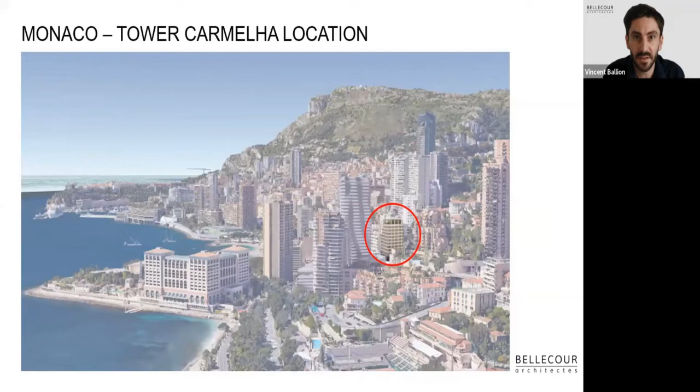We are designing this project with Aegis and Elliott engineering firms, and Gabriel Bureau, architect, oversees the execution. The project takes the place of an older building, the Villa Carmela. The site is typical of a compact city because neighboring buildings are close. The plot is small, 400 square meters, and the slope is steep.

There is a 12-meter drop between two streets. The Carmelha Tower is a residential building of 12 floors, only available to permanent residents of the principality. The building contains 25 apartments, 2 or 3 per floor, an open space office of 200 square meters, and the head is crowned by an open air stair.

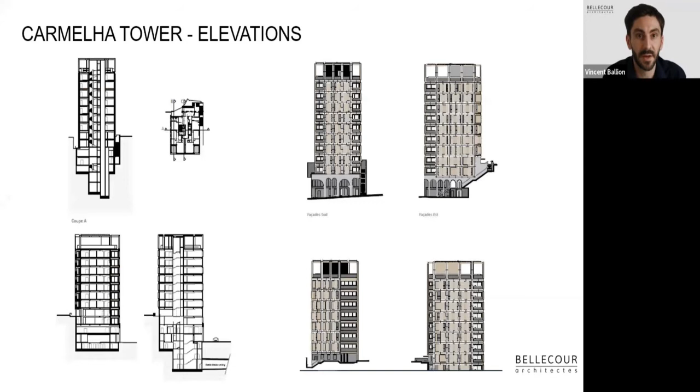The princely government ordered this project to increase the availability of dwellings, but also wanted to create an icon of energy transition in Monaco. As a consequence, Carmelha Tower project sets very ambitious environmental objectives.

It complies with the French green building standards: HQE, High Environmental Quality Label, and BDM, Mediterranean Building Label. The project attempts to achieve the highest level of each of these two certifications to reduce carbon emissions, save, store, and produce energy.

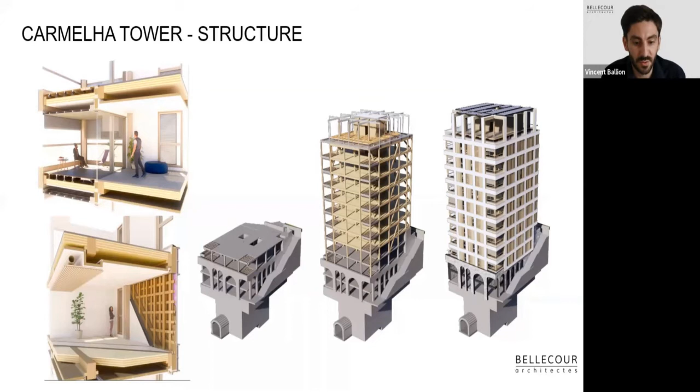The energy is produced with photovoltaic solar panels and is stored thanks to the addition of a hydrogen hub. Geothermal energy is also used to produce heat and cold for apartments.

Wherever possible, the environmental approach favors biosourced and eco-friendly materials, and wood for structure. The widespread use of a wooden structure also seemed relevant in a seismic zone. That is why the project was made of two sections.

The first is in concrete for infrastructure into the rock, and the base ensures the stability of the building. The upper part of the structure is entirely composed of a timber frame, using glue laminated framework for the exoskeleton, cross-laminated panels for inner and core floors, and wood frame walls for the building envelope.

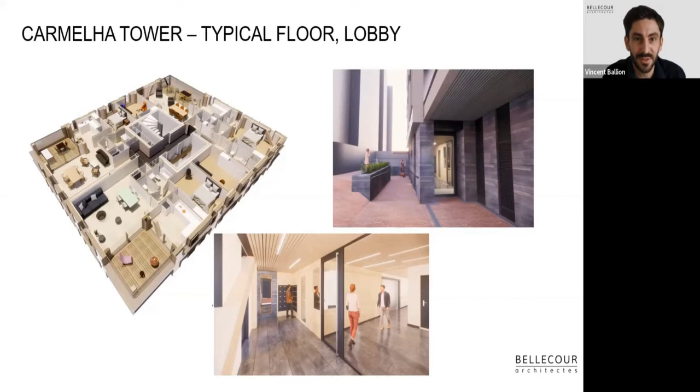Thank you, Vincent. I will explain you now a bit more about the structure. So I am Jean-Bernard Journeau. I am a structural engineer at Simonin in the Integrated Design Office.

If we go with the first slide, then you have an overview of the structure. It is a quite tall building, as we call it now, made of timber, and it raises 8 floors on the concrete base. It has been designed with a good selection of wood components, which fit for all the challenges of a modern housing building.

And in particular, there are 3 very important fields on which timber is very appropriated.

First one is thermal insulation. This is solved by an envelope made of composite panels, made of timber and mineral wool, which will be fixed on the facades.

Second field is about sound insulation, because in this kind of housing building, this is a very important topic. And today, this is solved by the use of CLT floors, cross-laminated timber floor panels, which will be associated with proper floorings and ceiling to have a good comfort.

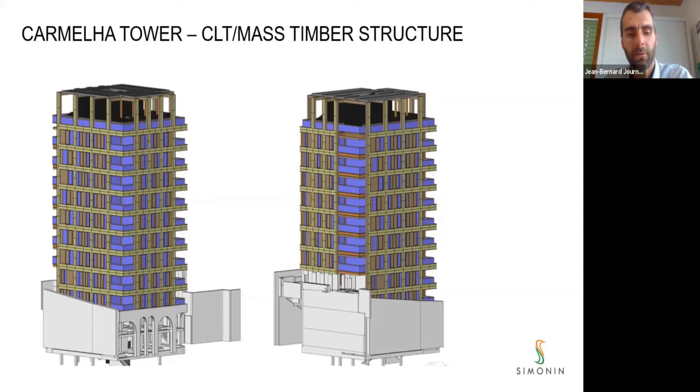If we go now with the second slide, I will present you quickly the structure, and we can see that the primary structure is made of glulam, posts and beams.

Simonin is active in the design process and proposes the best technology for the connection of the posts and the beams, with good technology, which is the RESIX system.

It's a system developed in our company for 20 years now, and which got all the certification and the testing in many different conditions: dry and wet, seismic design, and fire exposure.

And we will use this technology to make the structure very efficient.

In case of composite structure, it allows to build very high buildings with extraordinary strong connections and a very rigid behavior of the structure. And this gives a good guarantee to get a structure very stiff.

Timber connections with glued-in rods also allow very aesthetical joints and to give the joint visible, and that will be done in this case because the primary structure will be kept visible in the apartments, which means that

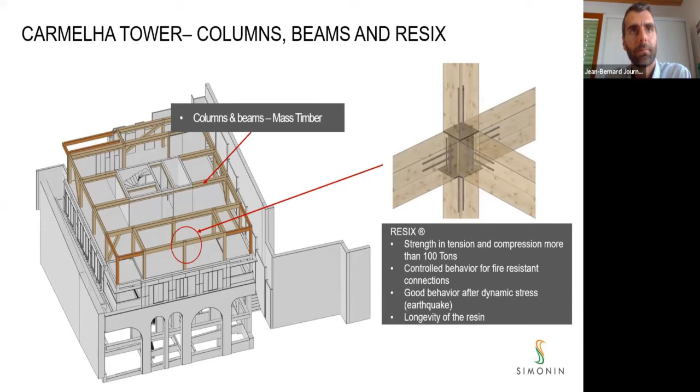The 400 cubic meters of timber floor panels will be locally sourced in France and in respect of all environmental purposes of this building.

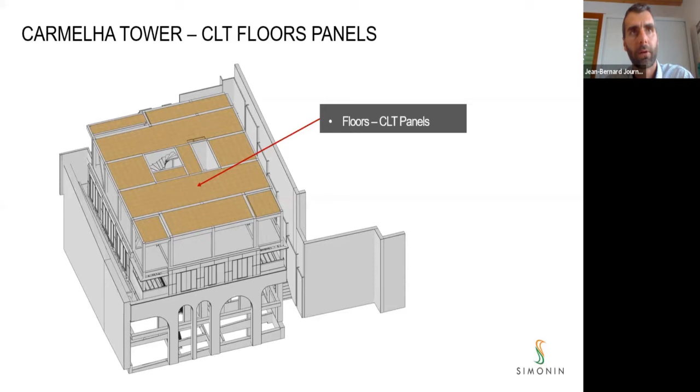The core will host the stairs and elevator shafts. And the CLT panels will be strongly connected to bring stability to the tower.

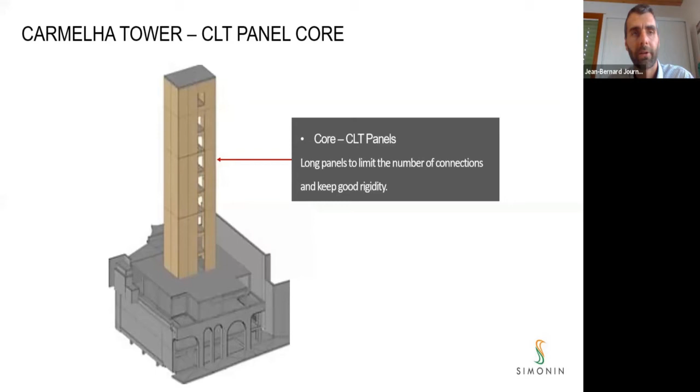The core is also ensuring the security of the inhabitants, and fire protection will be improved by a strong plaster covering of the CLT. On the next slide,

we have a view of the external skeleton of the structure, which is complementary to the core.

Timber diagonal members are also integrated in the architectural concept, and by the use of RESIX glued-in rod connections, we will design strong connections with very little visible impact in the apartments.

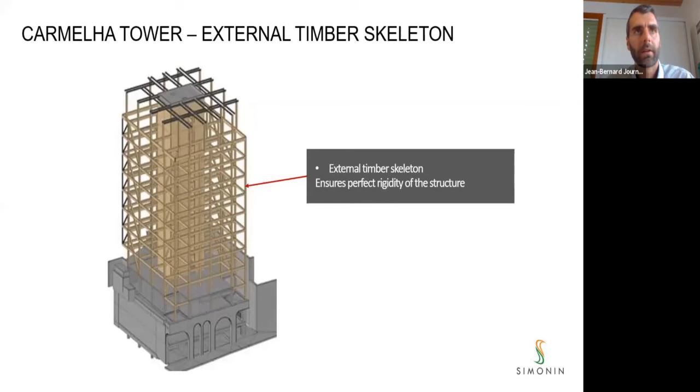Finally, on the last slide, this structure is more than 40 meters high above the ground, and it is a very challenging project because of the location on the seaside, with high wind velocity and in the seismic area.

Wind effects have been simulated by testing a model in a wind tunnel in the preliminary design stage. And seismic design is done with numerical models, including concrete and timber.

With the help of advanced finite element software, the behavior of the structure is truly analyzed with influence of the connection rigidity, which is very important in timber construction.

And this implies a tight relationship between the design team and the company, and all the companies. Timber structures being very dependent on the connection design, collaboration in design is essential to make it right. And Simonin has an integrated engineering office which will lead this structural design for the companies.

Prefabrication is also at the heart of our philosophy, and for that we are active in the BIM process, drawing any single part in a 3D model, which will be used by other companies. The narrow working sites impose a just-in-time organization, and any delivery needs to be planned. This constraint becomes an advantage at the time of building, because we estimate we can save 20% of time on the site because of preparation.

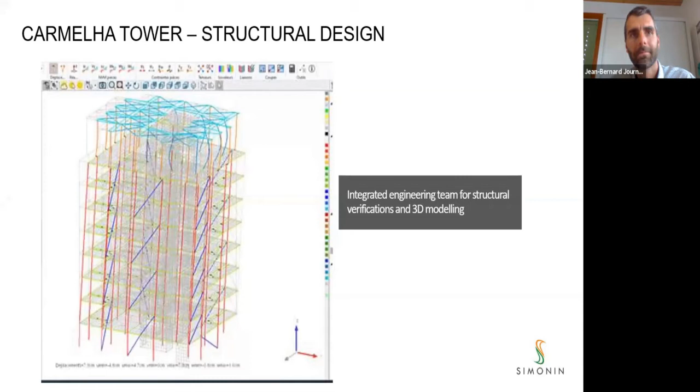Thank you, Jean-Bernard. So I'm going to present Upbrella and what Upbrella is. A lot of the things Jean-Bernard was mentioning, the tight collaboration with the design team and the architectural team, is a condition by which Upbrella can deliver more value than in the traditional sense. It's a very good approach, and it fits well with our own philosophy.

So what is Upbrella? Upbrella is a patented sheltered construction system. The first thing we build is the final roof, and we don't use tower cranes for the build process. That has all kinds of implications for site nuisance, safety, and the industrialization of the process itself.

So quickly, there's a bunch of videos available on YouTube if you want to see it. But what Upbrella consists of is a method and specialized equipment, and the method is a very simplified way. The first thing we do is build the final roof, and we install Upbrella, essentially the work site shelter.

Then we start the assembly of a floor structure at man height. You'll see how we're going to solve that issue with the Carmelha project, providing fewer connections than we would with a steel structure.

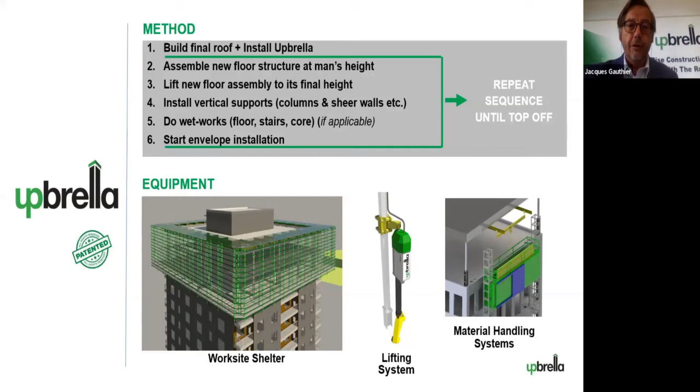So what is Upbrella? I'm on the marketing side, so there's my 5 minutes. We're what we call a responsible construction methodology. We favor sustainability a lot because we create less waste on a site. Essentially, we don't have much temporary setup and we don't use much temporary energy.

We're very pro composite, hybrid, and CLT mass timber structures. One of the advantages, and we've done a report on that, is that we effectively lower the GHG footprint of a construction.

Upbrella was initially designed with a lot of the health and safety concerns in mind. By not using a tower crane, you don't move massive pieces of equipment or components. 80% of the work for the structure and shell is done at man's height. There's much improved fall protection, and we install a lot of light industrial handling equipment on the site so that we have the ergonomics. That increases safety, increases productivity, adds value.

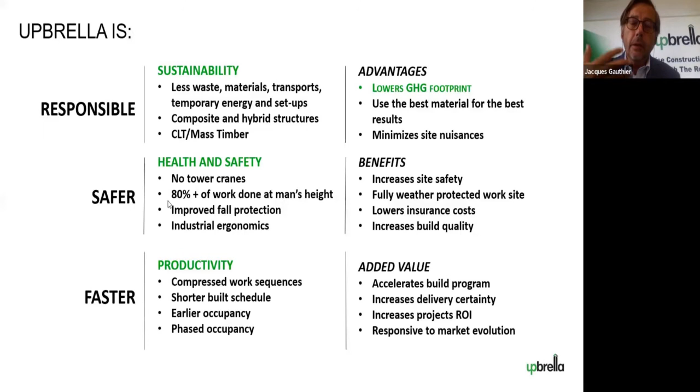The build programs are usually shortened, and the quality is just better. That's why we say safer and faster. So how will that philosophy be applied to the project?

Sustainability indicator: essentially we show that on 5 of the 6 key indicators used when evaluating a site or building for a label, in this case LEED, Upbrella with a composite structure will contribute. It can be demonstrated that 5 of the 6 indicators will be 20% better versus a conventional all-concrete build.

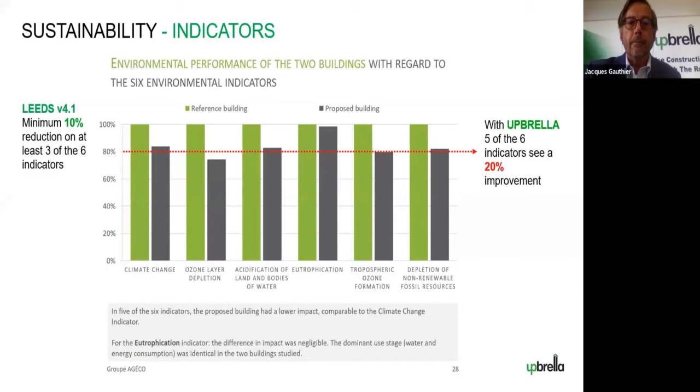So Upbrella, that's Upbrella in Carmelha Tower. This project was really driven by the intent of the Principauté to build apartments for its residents in a very tight environment, minimizing what we call site nuisance. It's basically noise, dust, use of public domain, blocking streets, everything that makes a site an irritant for the neighborhood and a risk for them. They wanted to minimize that. And thank you to Groupe Simonin for inviting us into the project. It was very smart of them.

So it evolved, and the customer came back and said, if you're going to do the building, why not also shelter the masonry and excavation work? So we're going to be deploying a shelter for that part of the work, and we should be there by late October, beginning of November. All of that work, les gros oeuvres as we say, will be done sheltered to minimize noise and dust, and make the site a bit more of a friendlier site for construction.

After that, the system is transformed for the tower assembly, and there you see a couple of images. Here's the link to the video on YouTube, but I'm going to go through and show you the video. It lasts about a minute and it's the conceptual view on how we're going to go about and create the Carmelha Tower and fulfill the intent of the customer.

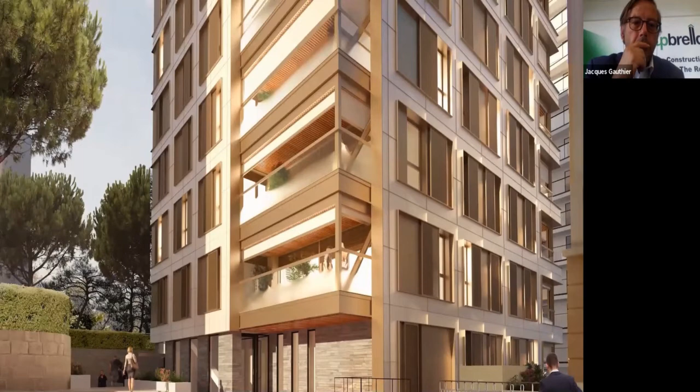So during the assembly for the floor, what we're going to be using is a temporary fixed installation of a Resix connection, an additional Resix connection, so that we can have a man height assembly of that floor.

So in a nutshell, that was how this building will be erected using the Upbrella technology, and fulfill, like I said, fulfill the intent of the customer to have a very green building, exceeding most of the labels in terms of environmental performance and responsible construction in a very tight and dense urban environment.